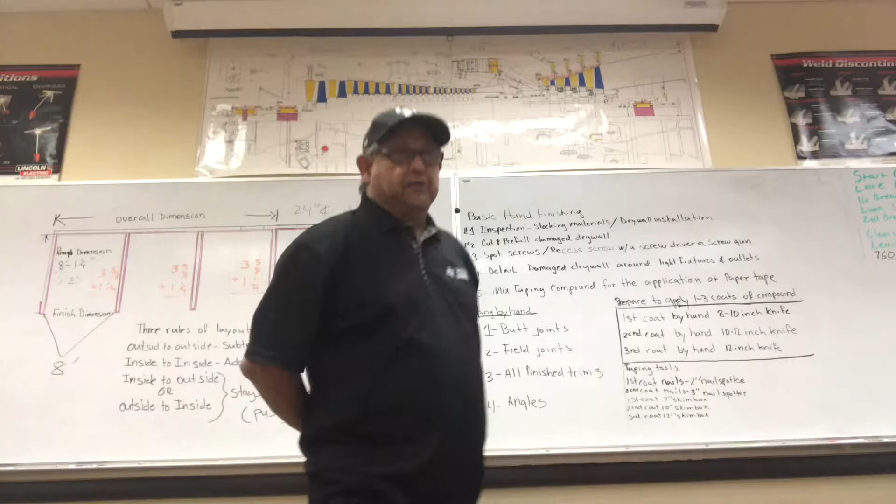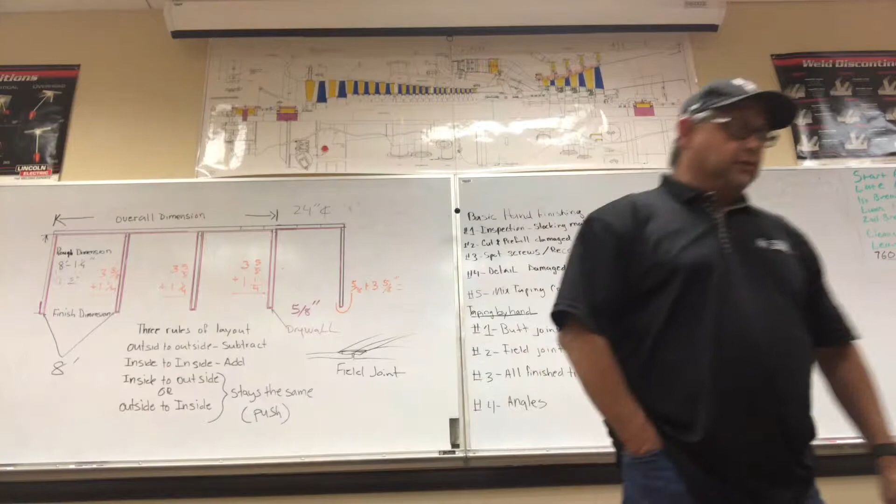Good morning. How's everyone doing? Oh, very well, very good. Glad to hear.

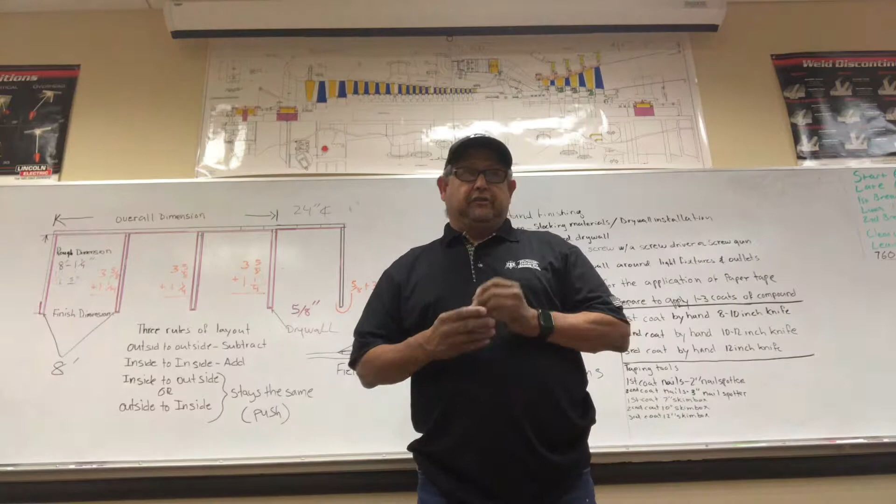You're here for a basic hand finishing class. The first thing we're going to do is go over all the rules and regs of the training center. Second, we'll go over the shop floor rules and regulations, so you have an understanding of what we need to do out there on the floor. We're going to cover equipment and tool safety when we get on the floor.

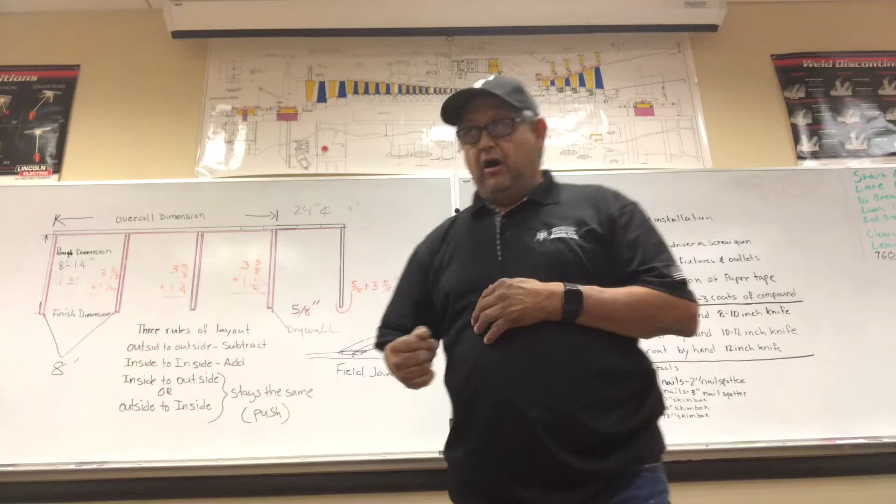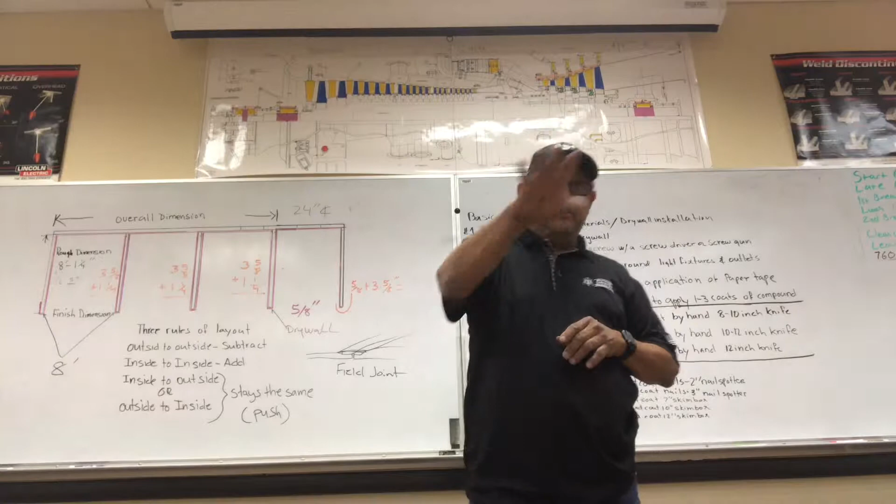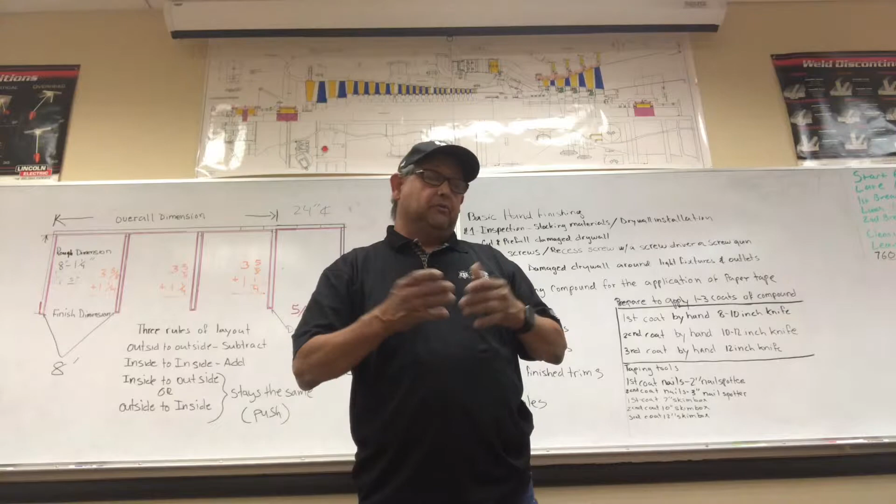Okay, do you have any questions? Oh, okay, good. So you've taped before, I see, yes? Oh, okay, good, so you have a little knowledge. That's perfect, you can help me with those who don't have that experience, and that way things will go a little smoother for all of us. You'll help me out. We have a pretty good class. I have 10 students. It's perfect.

I love it. If you can see the module we're going to be building, it's 4 modules. I could put 2 guys per module, and 3 on 2 of them, so now we can work together.

Okay, we're going to basically lay it out using Pythagorean theorem, 3, 4, 5. We'll set our control line, we'll set our mark, we'll do our first wall, we'll square it up, and then we'll frame our project from there.

Once we get the project framed, then we'll sheetrock it. Once we sheetrock it, we'll go ahead and put the trims on for the finish, so that way we can start on the basic hand finishing.

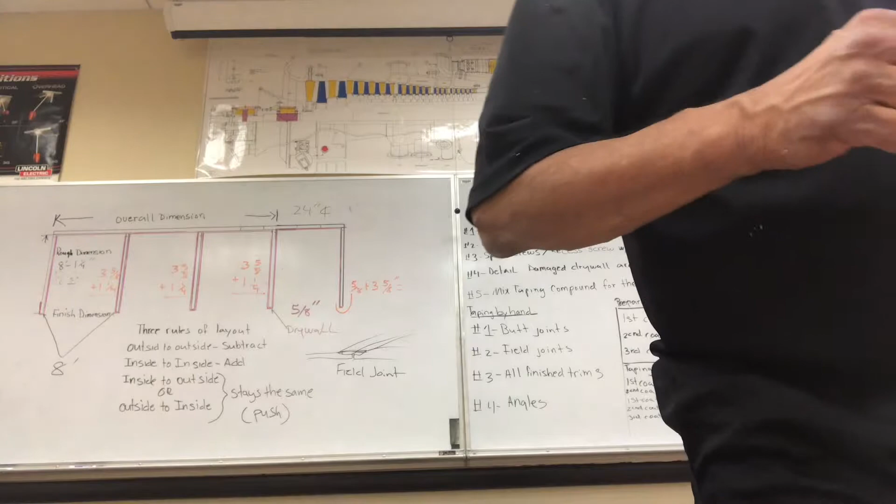The process I like to use once we start the basic hand finishing is we re-inspect the work site. We go back through and make sure we stock our materials where we're going to use them. Agreed? Okay. So then, as we look at what we've just installed, all the drywall, everything's finished, we look at the process.

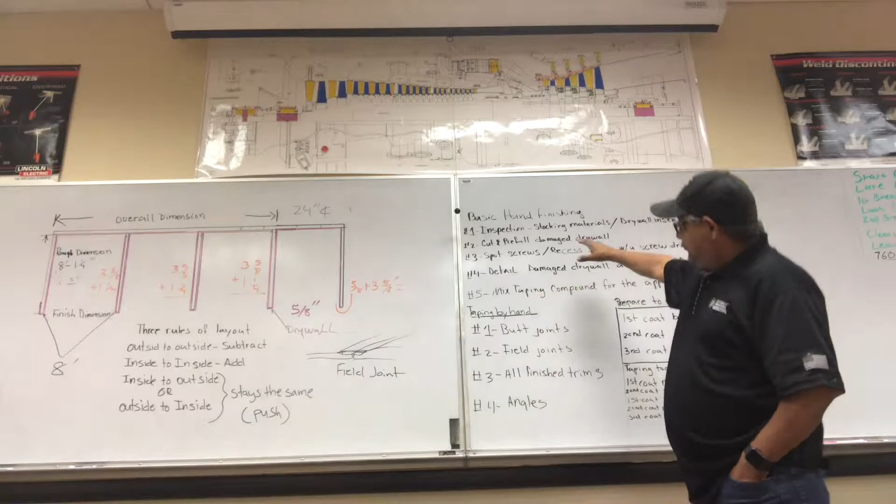We cut and pre-fill all the damaged drywall. So if you have any broken edges, we cut it with a knife, we pack it with mud, wipe it down, and get it in preparation to put our tape on.

You following me so far? Yes? Oh, perfect.

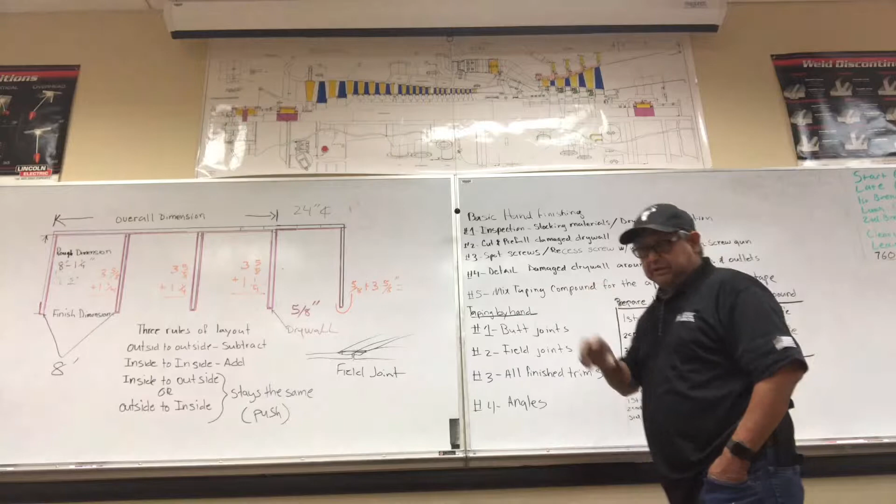Okay, so what do we do? We spot the screws, that's one of the first things we do. Then if there's any screws that are hanging out, we recess them. We put them in with a screwdriver, or we can use a screw gun to set them in, because we don't want to bang the drywall, we don't want to damage the drywall, or we don't want to damage the studs. We want to make sure we leave a real good product.

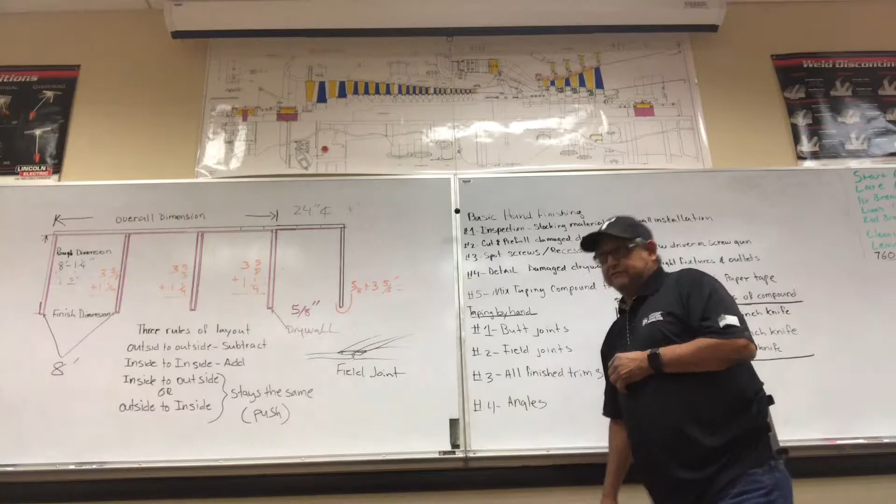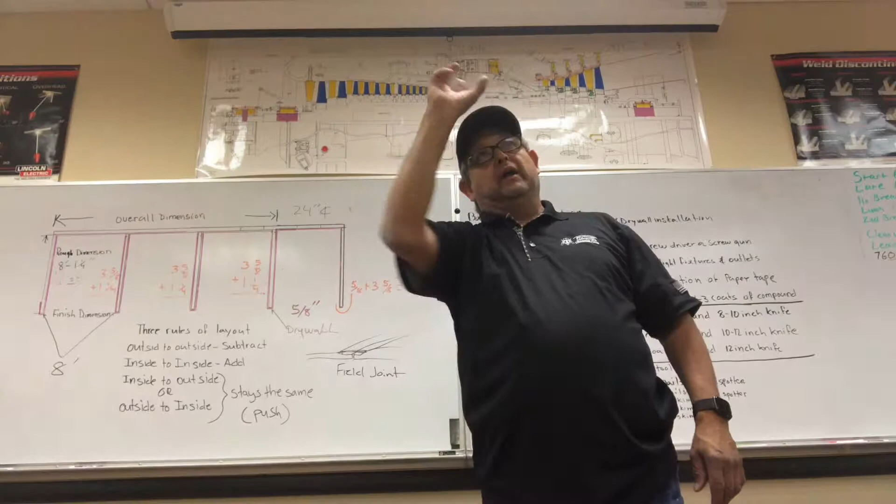Then we go through detail like the outlets, the light pockets or around the rings. If there's any damaged drywall, we cut it out. We pre-fill it with mud, and then we put tape, and once it dries and sets, then we spin the detail with compound.

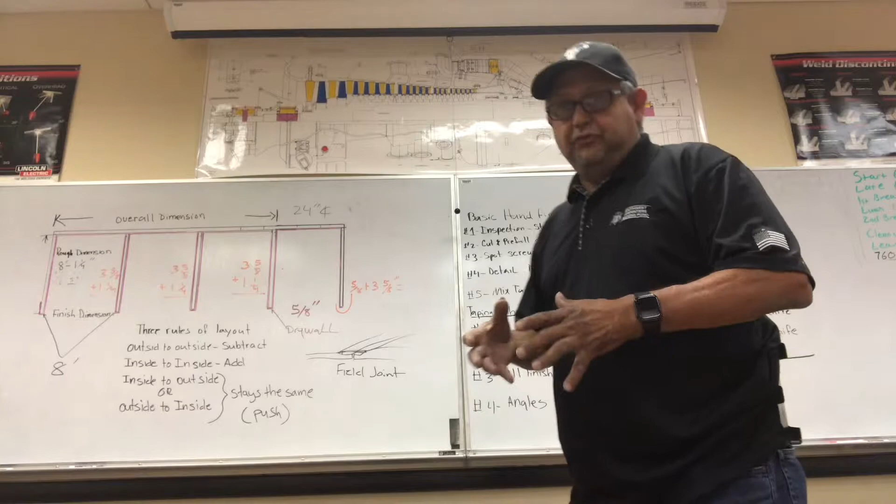Then what we're going to do is I'm going to show you how to mix the compounds for different levels of finish. So that way when you're embedding your tape, your mud's not too thick, and when you wipe it down, it'll wipe down real nice and easy, so you're not working too hard.

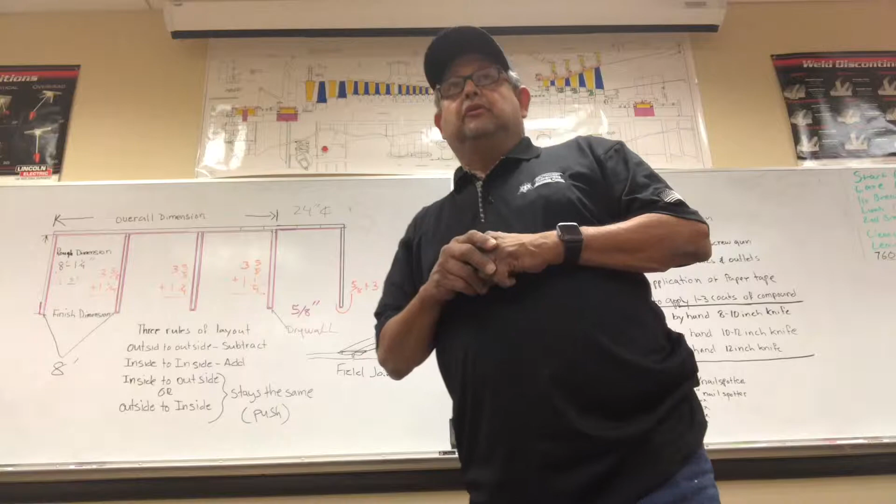Do you have any questions so far? No? Oh, great. So you've done this before? Yes. Oh, that is fantastic.

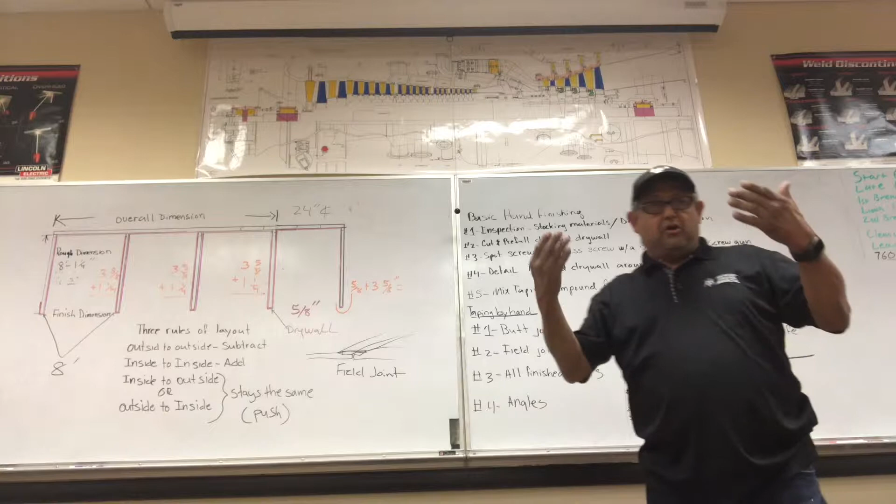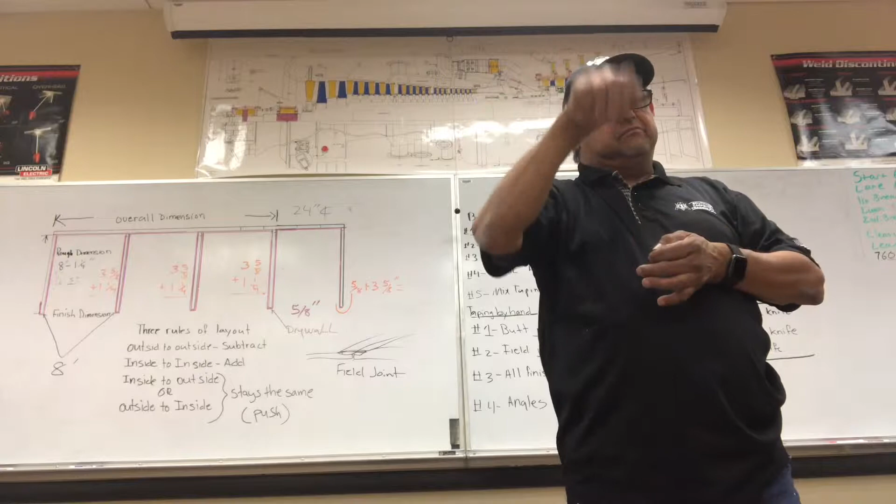The process that we use for basic hand finishing is, the first thing we do is we check what we call the butt joints. That's the two cut edges of the drywall, the end points, or if you cut it and butt it against each other. You have to kind of get a razor blade, clean it up a little bit, strip it in with mud, and then we tape that first down to the field joint.

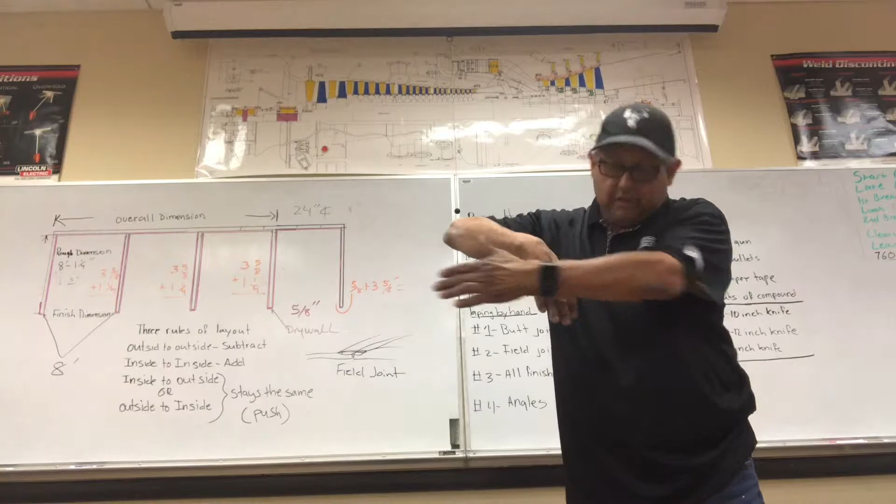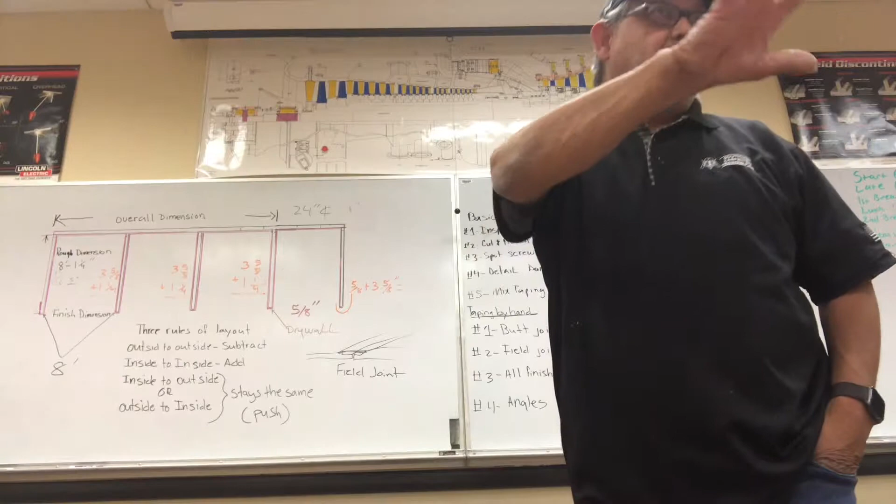The process is an overlapping process. When you do the butt joint and embed the tape, then embed your tape into the field joint, it overlaps that tape you just applied on the butt joint. Then any corner beads or trims you've applied on the drywall or anywhere on the project, make sure you cover those with tape, embed that, clean it, and that overlaps the fields.

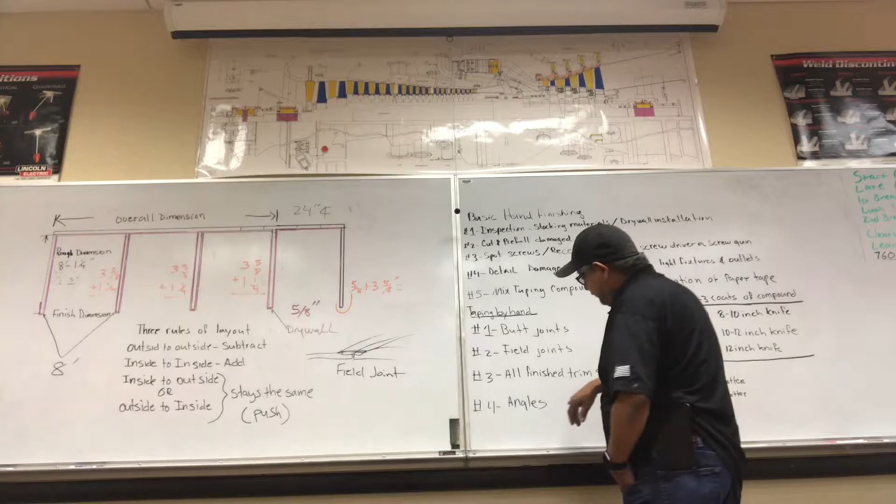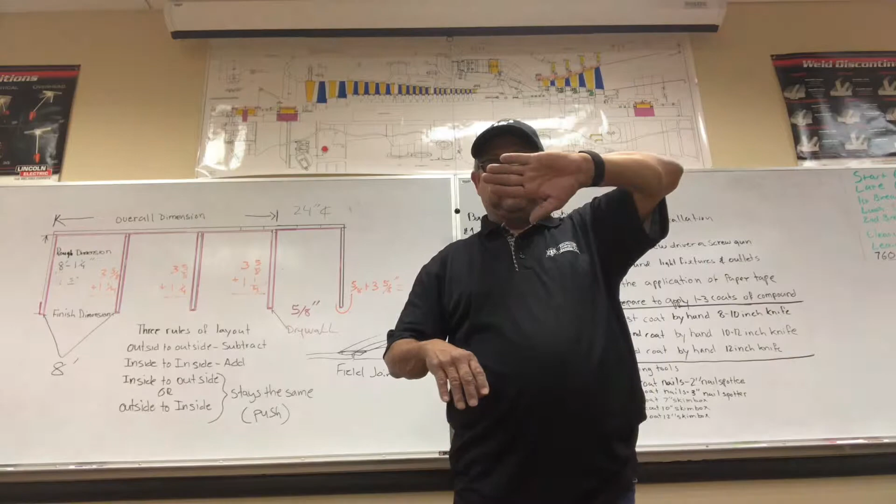Last but not least is always the angles. We finish the angles last because it's an overlapping process. So if you have a trim coming through, your tape's going to be here, your angle's going to come up and it's going to cover that. It's going to give you a nice clean edge. And we're going to do this all by hand.

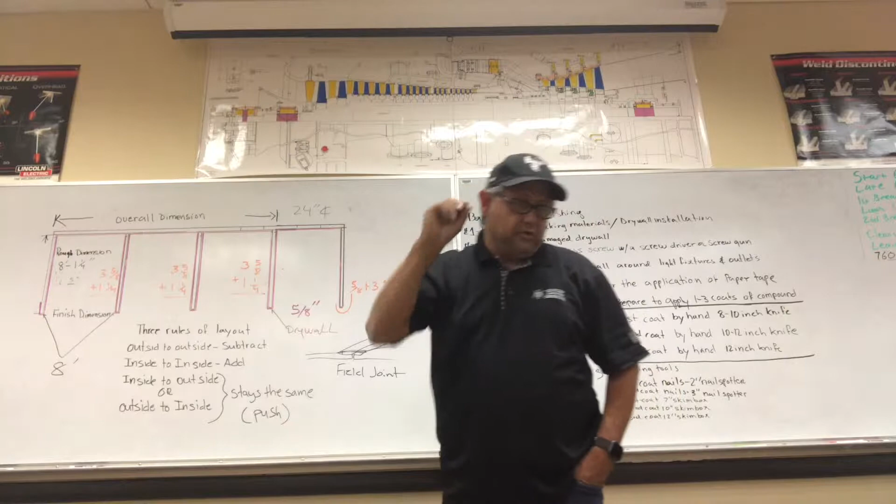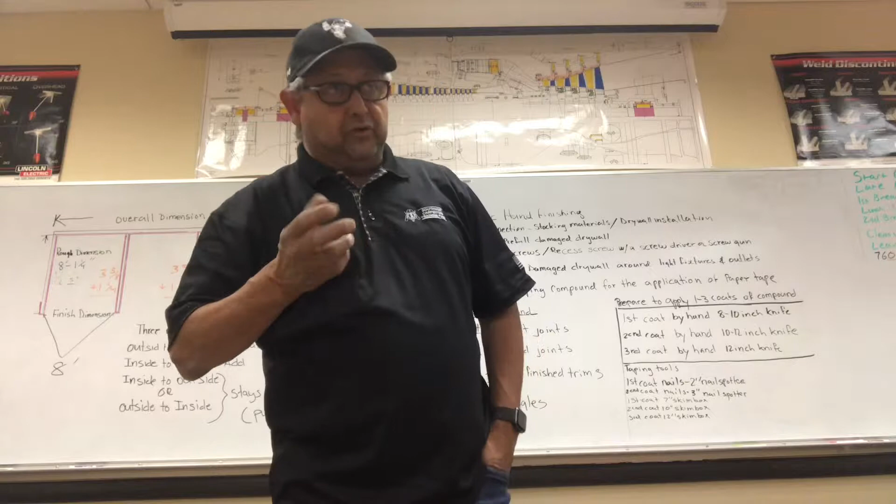So I'm going to show you a video right now, and it'll show you the different processes for basic hand finishing, mixing the materials, so you have a better understanding of what I'm talking about. And then once we're done, we'll go to the floor and go over the equipment and tool safety, and then we'll get started.

Well, here we are on the floor. We are going to go over again equipment safety, tool safety, and the reason is because when we go ahead and put the Perrys together for the job we're about to do, we want to make sure they're put together correctly, right? Very good.

You got to make sure everything is connected properly. Make sure you lock in your latches. That way when you're on it and it's moving around, they don't come out, they don't pop on you, and the scaffold won't collapse.

One of our great tools we use, we put our mix in here, we put our water in here. We also use electricity. We have to be careful because we work around water. We are a wet trade. We need to make sure we protect ourselves from getting electrocuted.

Also, our tools that are taping knives, we have to be careful because it's metal, very sharp. The knives are very sharp. You have to be careful when you're applying your mud. So these are the things we need to look out for when we're working with drywall finishing.

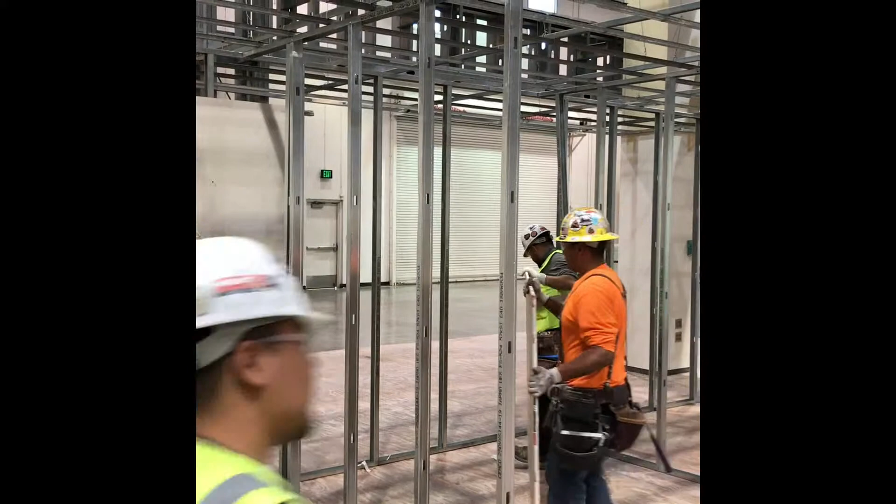So as you can see, they're getting ready to snap the line. Once we do that, in preparation to hang the drywall, as you can see, they laid the bottom track, top track, and they're starting to put the studs in, and then we'll be getting ready to install drywall. The students are now taking the drywall, starting out from their layout to place the board so they can start hanging.

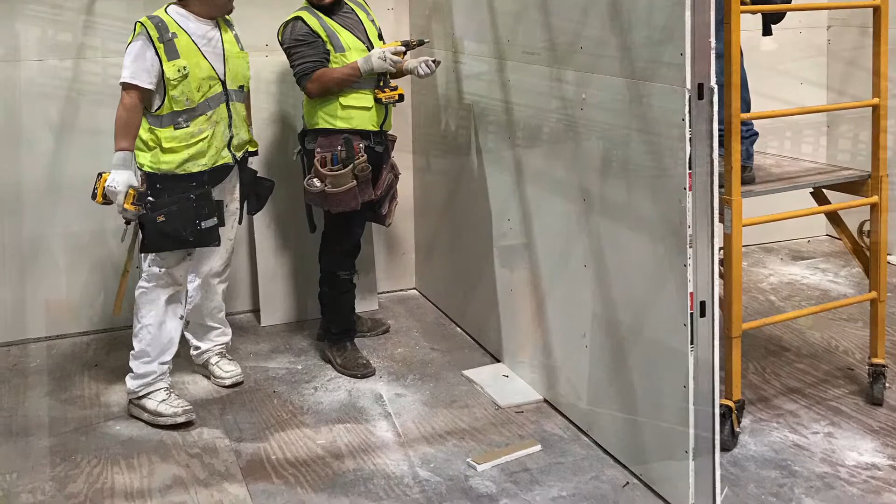Once they finish hanging the drywall, they'll go ahead and get ready to prep the floor with paper to protect it, so when we apply the mud, it'll make for easy cleanup. And then we install corner bead in preparation to tape, bed it, and set that, then you can put it back on. Yeah, right. So as you can see, nothing like having a little comedy added to the class.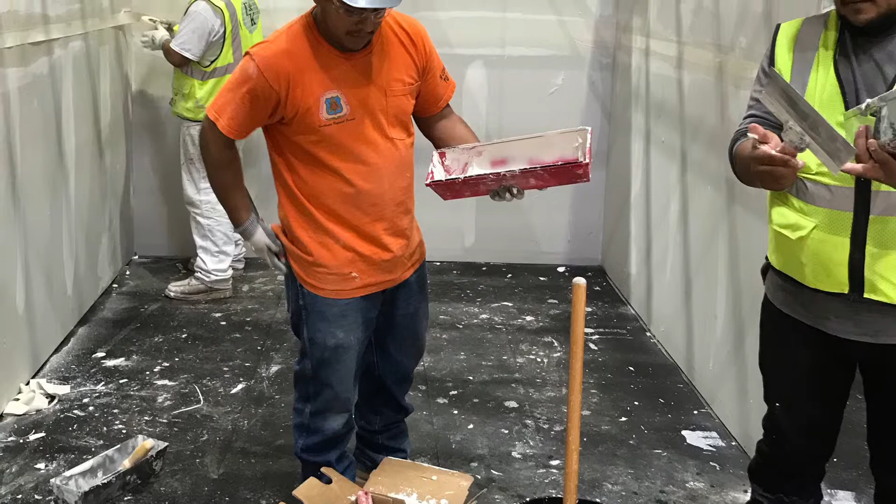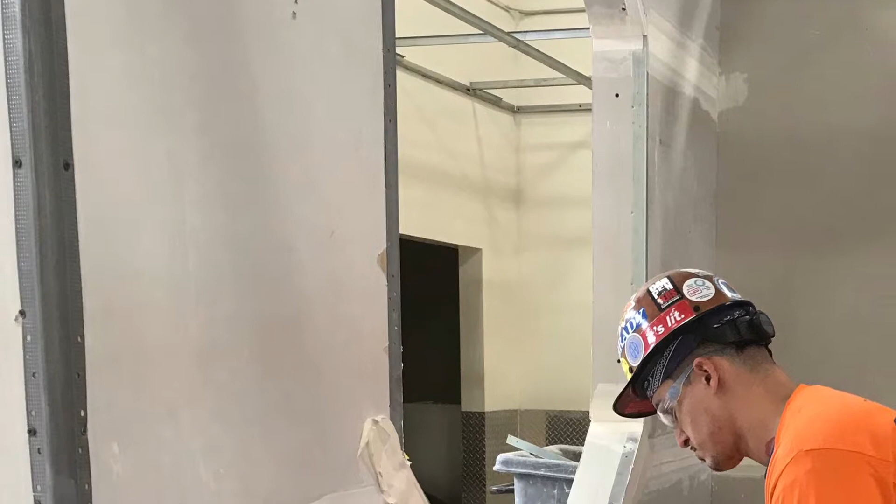We're mixing mud right now in order to embed the tape. As you can see, the young man in the background, and these two gentlemen here are coating the corner bead and putting the tape on. This gentleman here is following the process of putting the tape on the corner bead on the window.

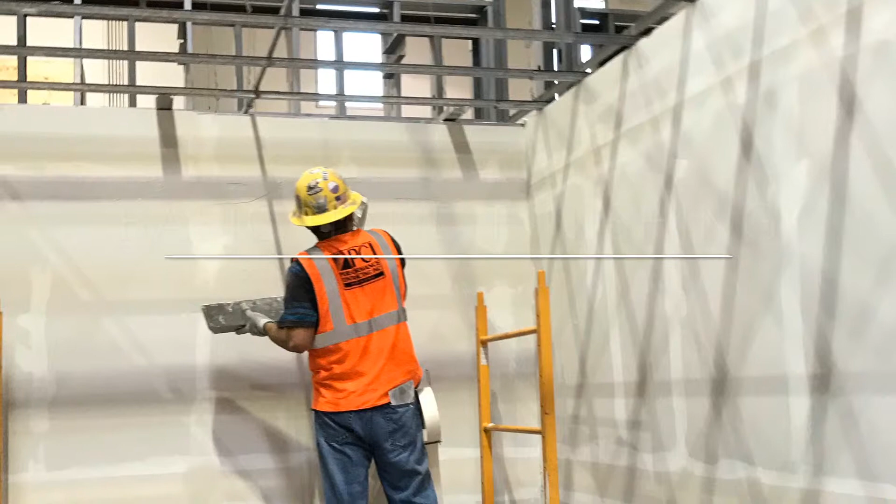And towards the end of the week, everyone will follow the steps: spotting the screws, pre-fill, spotting screws, applying the tape to the joints by hand, then to the fields, then to the metal. And then after, give me one good hand coat, and that right there will demonstrate that they've learned the process for basic hand finishing.